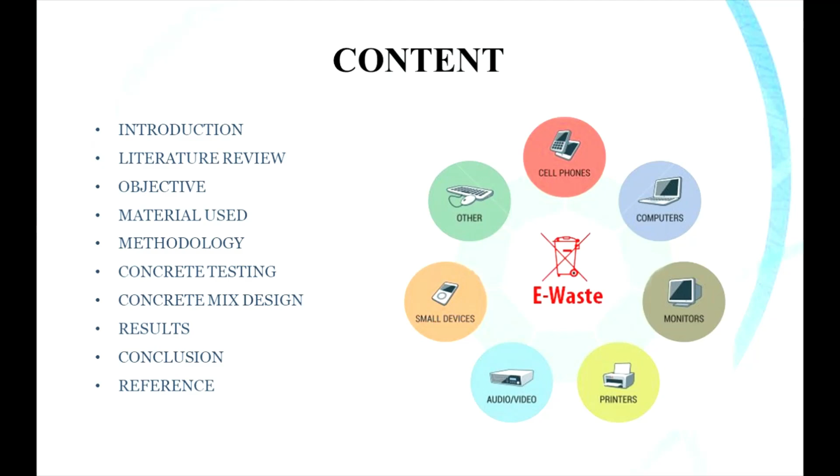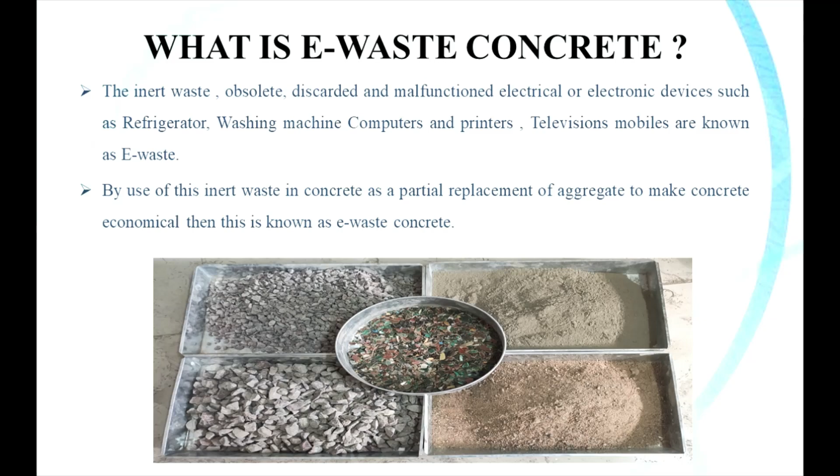So first of all, before starting our presentation, we will focus on what is e-waste. E-waste is an inert waste, obsolete, discarded and malfunctioning part of any electrical or electronic devices such as refrigerator, washing machine, computers, television, mobiles, etc. When such inert e-waste is used in concrete to make it economical, then this concrete is known as e-waste concrete. We are using this e-waste concrete in our project.

So as we all know, in today's modern world, the consumption of e-waste is increasing day by day because the use of electronic devices is increasing. So this project deals with the study of utilization of electronic waste by partially replacing coarse aggregate with it. We are replacing the coarse aggregate of maximum size 20 mm only. We are testing the strength results at 7 days, 14 days and 28 days.

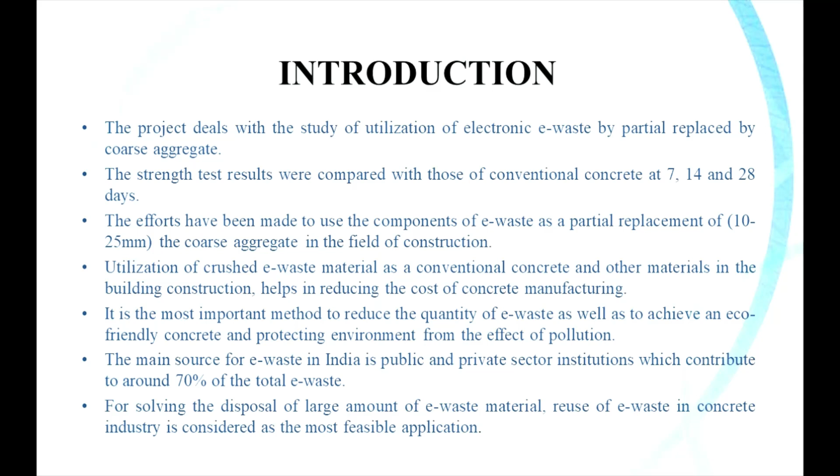This project also deals with the disposal of e-waste because it is very harmful towards our environment. So we are making an eco-friendly concrete, protecting the environment from the effect of pollution. Next slide, that is literature review.

We read around 8 to 10 research papers about our project. Some of the research papers are mentioned here. First of all, here is Pravin and his teammates in the year 2019, SP Kale and his teammates in the year 2016, Amiya Akram and her teammates in the year 2009.

In all research papers, we have found that when they replace coarse aggregate with e-waste in the percentage of 10% to 15%, the strength is constant or increasing. After 15%, the strength starts decreasing. So we focus mainly on the percentage of replacing coarse aggregate with e-waste.

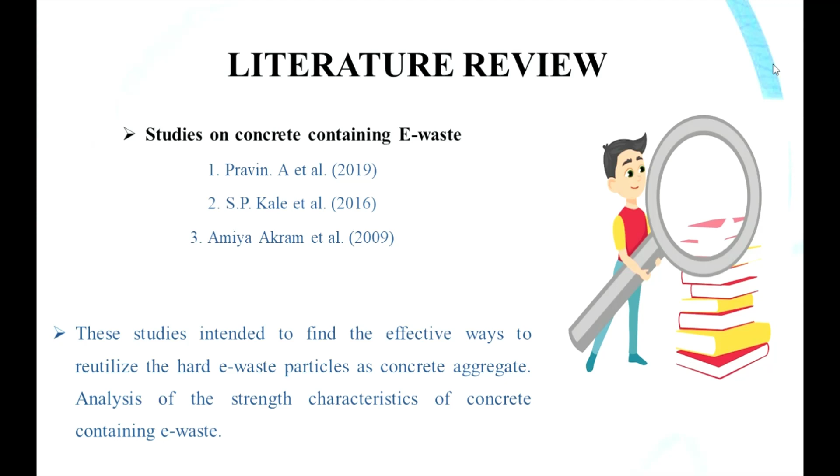Moving towards the next slide, here is the objective of our project: to investigate the potential of e-waste as a partial replacement for coarse aggregate. Second one is to optimize the percentage replacement of coarse aggregate by e-waste in concrete by conducting tests. We are conducting the workability test and the compressive strength test. As I told you earlier, we are checking the strength of concrete at 7 days, 14 days and 28 days.

Third one is to study the effect of aggregate and e-waste on modified concrete and also to compare the conventional concrete with e-waste replacement. We are comparing the conventional concrete with our e-waste concrete. In our project we are making M25 grade concrete. The ratio of M25 grade concrete is 1:1:2.

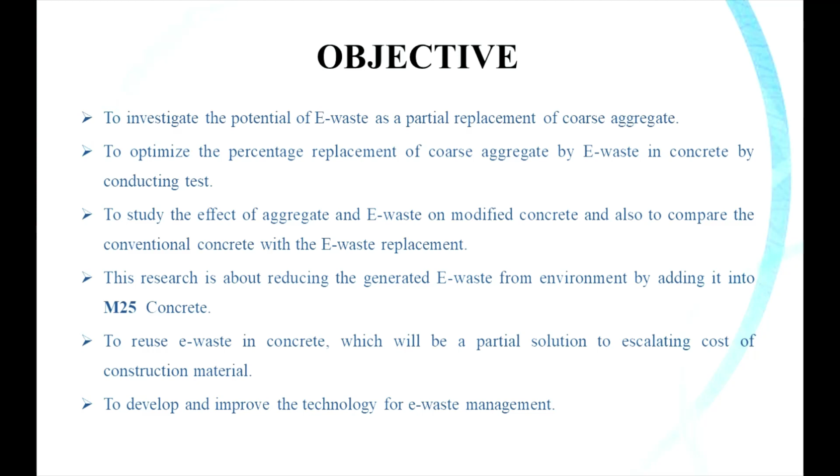Third one is fine aggregate. We are using river sand as per IS 2386 Part 1. Fourth one is coarse aggregate. We are using a maximum size of coarse aggregate up to 20 mm, as per IS 2386 1963. Fifth one is marble dust. We are using marble dust as an additional material, just like e-waste, to increase the strength of our concrete. Sixth one is admixture, and seventh one is water.

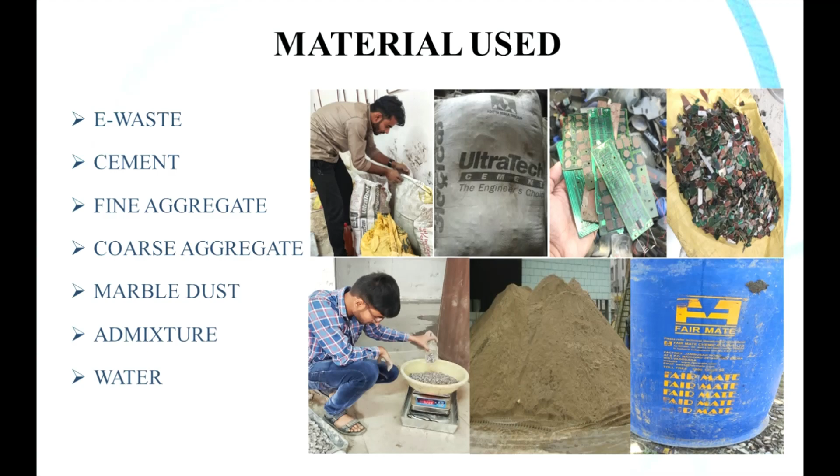We are using water as per the IS 456 2000. Moving towards the next slide, that is methodology. This flowchart shows the methodology which is used in our project work.

First one is collection of material. Second one is testing of materials in lab. We are testing for specific gravity, water absorption test, etc. And third one is preparation of concrete. Fourth one is testing of fresh concrete. Testing of fresh concrete includes workability test, in which there are three tests we perform.

First one is slump cone. Second one is compaction factor. Third one is flow table. After that, casting of cubes, and after that there is curing, and after there is testing of cubes. As I told you earlier, the testing of cubes takes place at 7 days, 14 days, and 28 days. And after that there is result analysis, and at last there is conclusion.

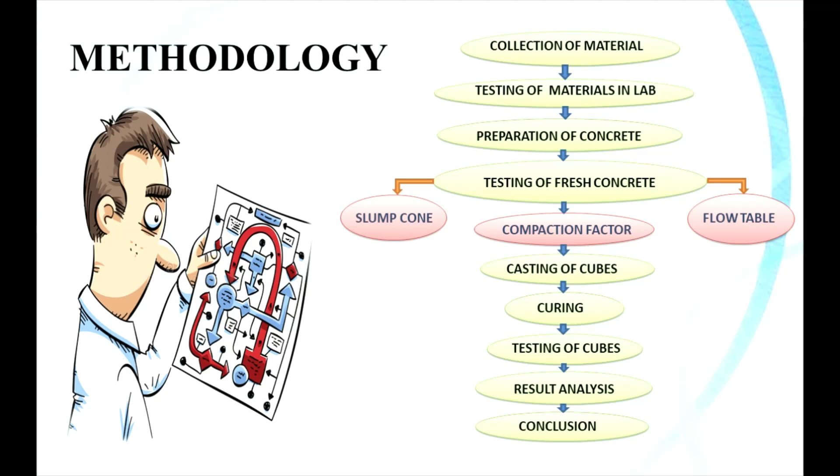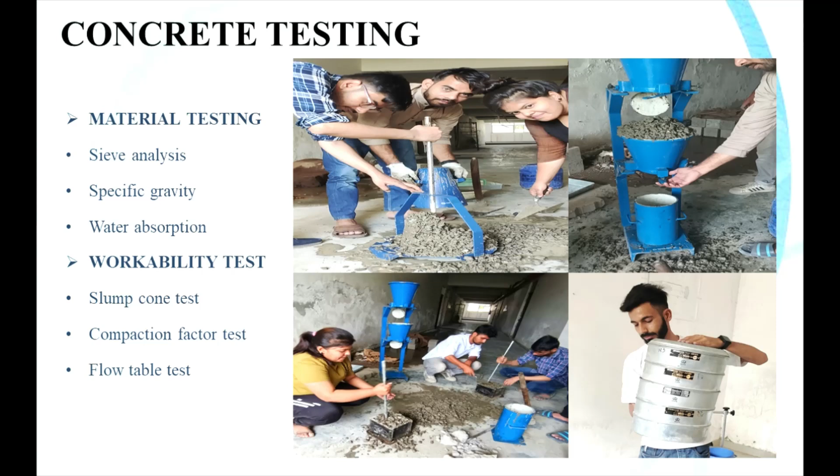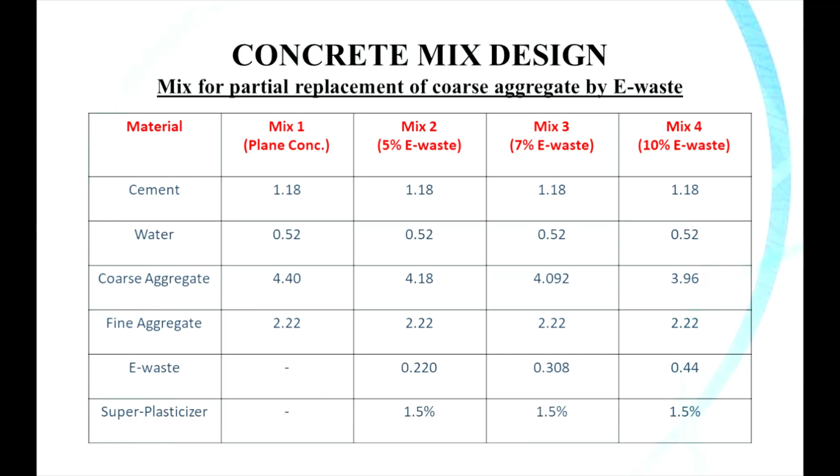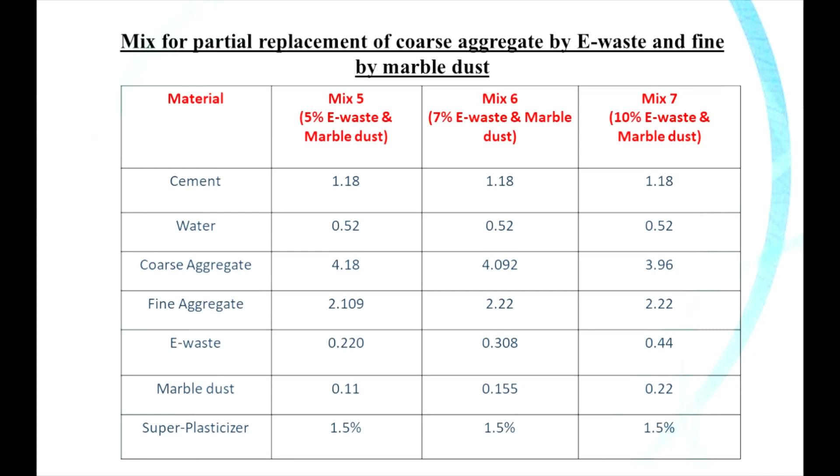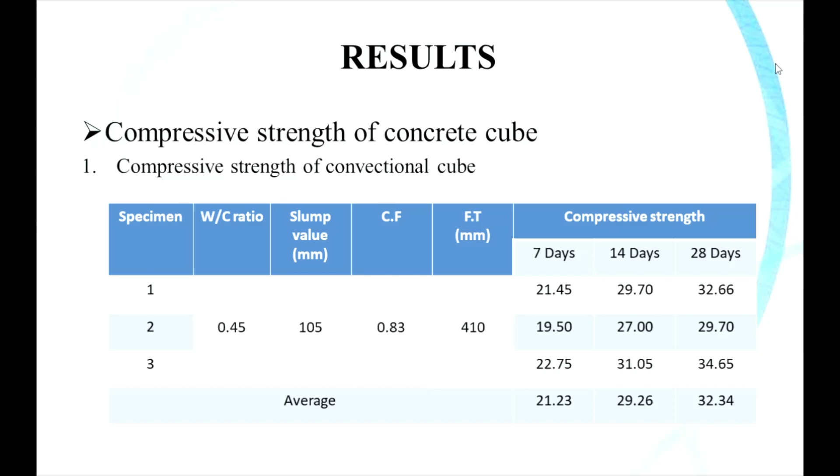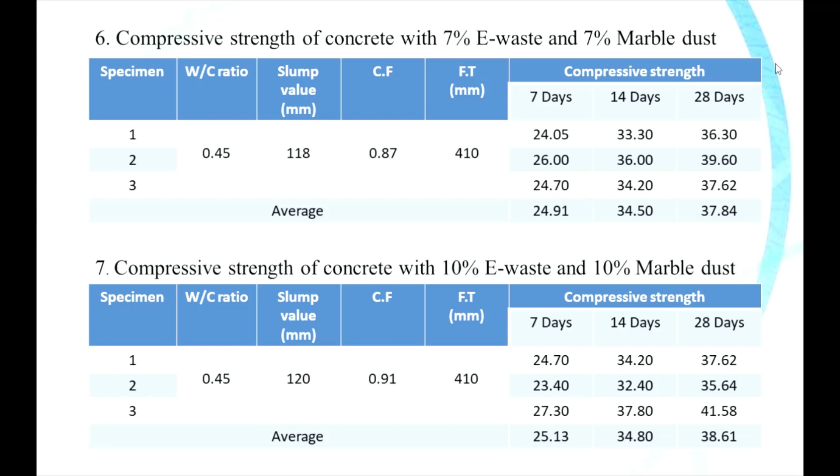37.84 megapascal. So the compressive strength of concrete with 10% of e-waste and 10% of marble dust addition, the average strengths are 25.13 megapascal, 34.80 megapascal. At 28 days there is a strength of 38.61 megapascal. So as we see, there is a slight increase of strength with the addition of marble dust to the e-waste.

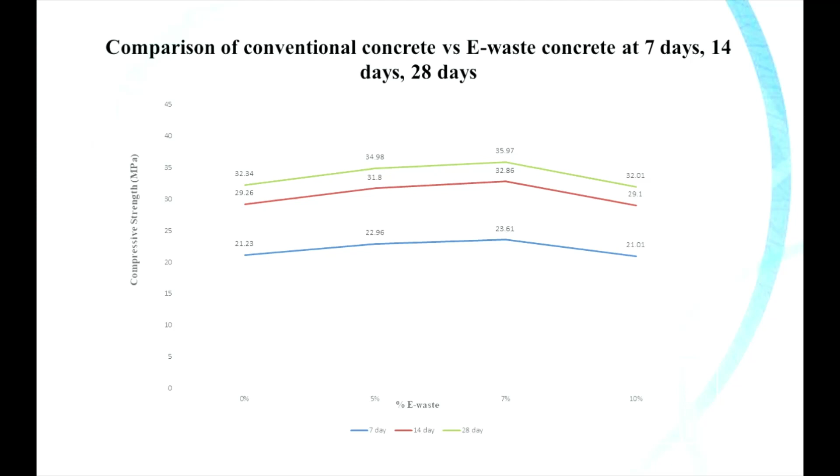So moving towards the next slide, this graph shows the comparison of conventional concrete versus e-waste concrete at 7 days, 14 days and 28 days. As we see in the graph, there is a peak strength gain at 7%. The strengths are 35.97 megapascal, 32.86 megapascal and 23.61 megapascal. So at 7% there is an increase of strength, and after that there is a slight decrease of strength at 10%.

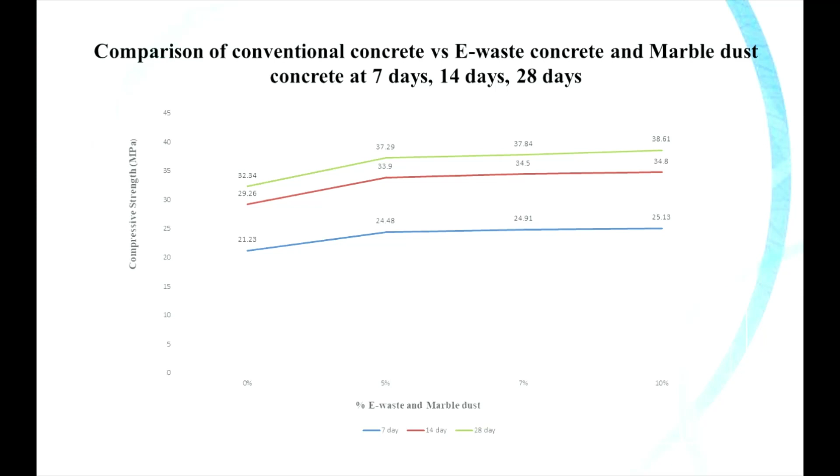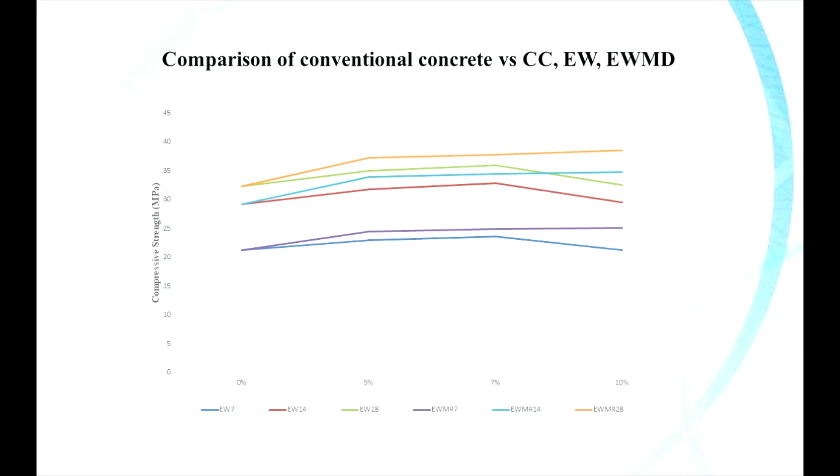Moving towards the next slide, that is why we should win. We should win because it is one of the best methods of disposal of e-waste, because we all know that e-waste is very harmful to the environment because it contains highly toxic components like lead and cadmium, and it is very harmful to the environment and all living beings. It affects the nervous and blood system of human beings and also has a negative impact on children.

The second one is that natural imbalance can be avoided by replacing coarse aggregate with e-waste in concrete production. Yeah, the balance is maintained, because the disposal of e-waste is a very difficult process.

If we do landfilling, then it contaminates the groundwater. If we do incineration or try to burn the e-waste, then it emits highly toxic gases into the environment, which is very harmful to the atmosphere.

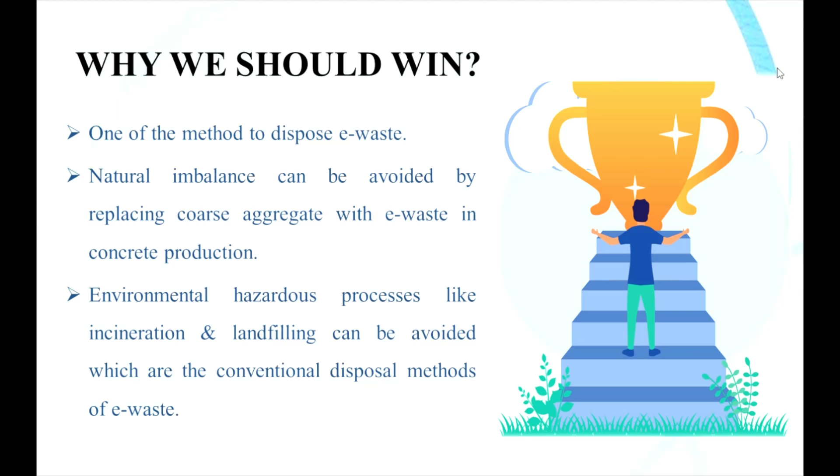So moving towards the next slide, that is our limitations. In our project, we are maintaining constant admixture, super plasticizer, by varying e-waste and marble dust content. Second one is only M25 grade concrete cube is casted. Yeah, we only casted M25 grade concrete. Third one is conducting only compressive strength test on the e-waste concrete. We tested only for compressive strength. We did not test for tensile strength and also for flexural strength.

Fourth limitation is only coarse aggregate is partially replaced by e-waste. We only replaced the coarse aggregate. We did not replace any other component of concrete. So these are our limitations.

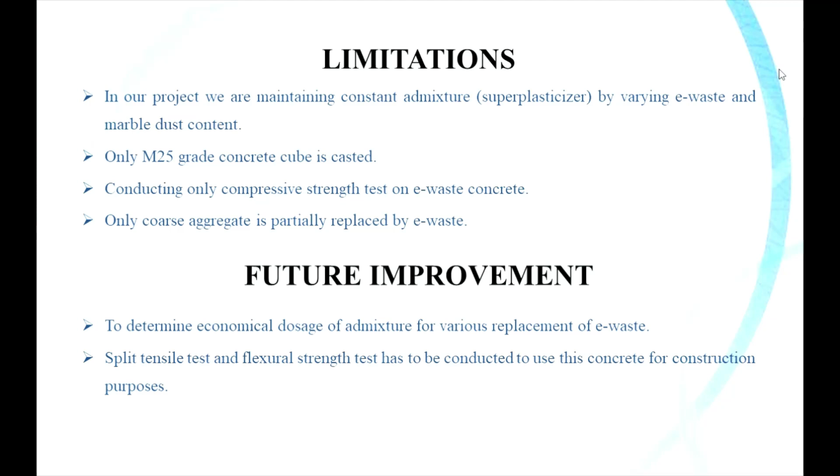The next one is future improvement: to determine economical doses of admixture for various replacements of e-waste. Second one is split tensile test and flexural strength test have to be conducted to use this concrete for constructional purposes. Yeah, these tests are also very important to be conducted on concrete to use it in major construction purposes. Moving towards the next slide, that is the conclusion of our whole research.

It is observed that up to 7% replacement of coarse aggregate with e-waste there is an increase in all mechanical properties. The tables are the proof which show that up to 7% replacement of coarse aggregate there is an increase of strength. After 7% there is a slight decrease of strength. Second one is when the percentage of e-waste increases up to 10%, the compressive strength decreases slightly, which is nearly the same as the conventional cube. As we increase the percentage from 7% till 10%, there is a slight decrease in compressive strength, which is nearly equal to the conventional concrete.

And the third one is that addition of e-waste with marble dust shows increase in compressive strength even above 10% replacement of coarse aggregate. So when we add the marble dust as an additional material with e-waste, then there is an increase in strength as compared with the e-waste concrete only. This replacement also worked above 10% replacement of coarse aggregate. So marble dust is a good material to increase the strength with e-waste.

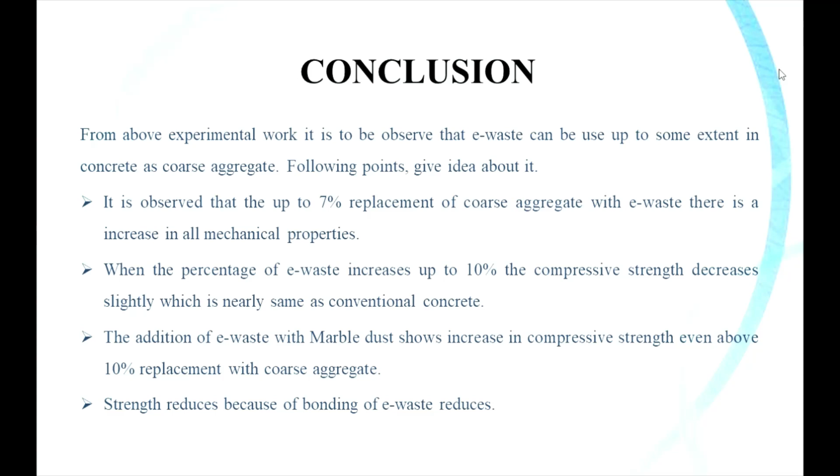Fourth one is strength reduces because bonding of e-waste reduces. As the bonding of e-waste is not good in concrete, because of it there is a reduction in strength. Fifth one is it is identified that e-waste can be disposed in concrete as coarse aggregate. E-waste cannot be disposed in concrete as a fine aggregate. Sixth one is the volume of e-waste on earth reduces when it is used in concrete. As I told you earlier, it is one of the best methods of disposal of e-waste.

Seventh one is up to 5 to 6% replacement of e-waste is suitable for use up to G+2 building construction and road construction. So it has been concluded that with the replacement of 5 to 6% of e-waste in concrete, this concrete is used in G+2 building construction and is also good for road construction. Up to 10% replacement of e-waste is used in construction where low strength is required, such as garden walls, construction walls, etc. As you all know, garden walls bear less load. So 10% replacement e-waste concrete is used in those low strength works.

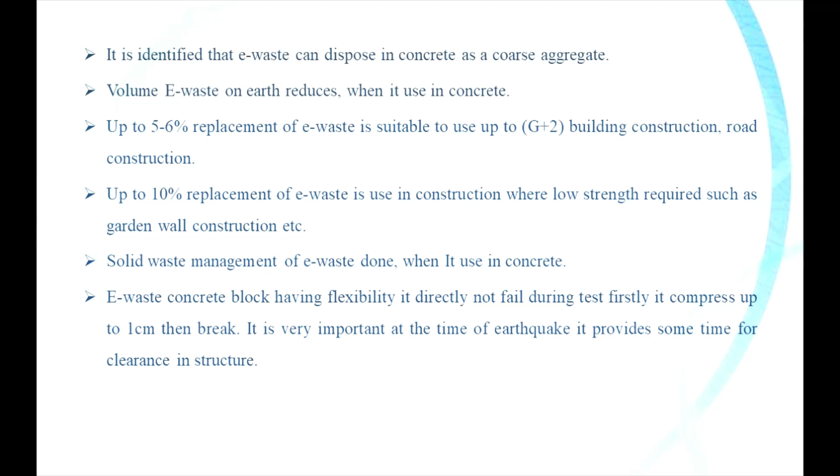Then next point is solid waste management of e-waste is done when it is used in concrete. So it is also a good method for solid waste management. Last conclusion is e-waste concrete block has flexibility. It does not directly fail during the test. Firstly, it compresses up to 1 centimeter, then breaks. So our concrete block has flexibility. So it is good for earthquakes because at the time of an earthquake we need some clearance in the structure. So flexibility plays a very important role in earthquakes. So it is good for earthquakes also.